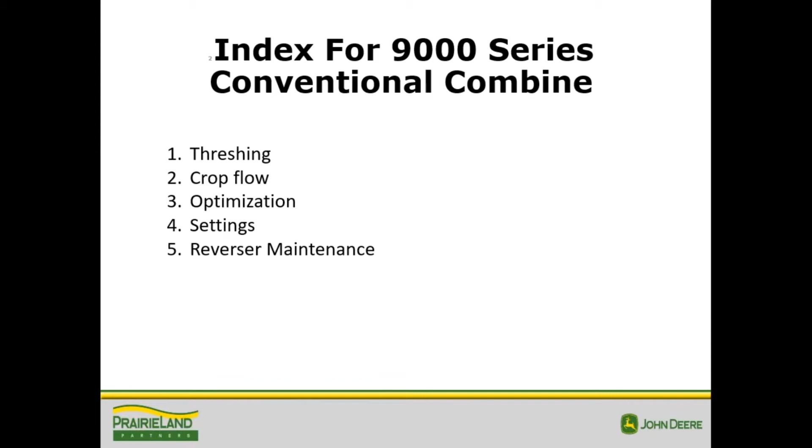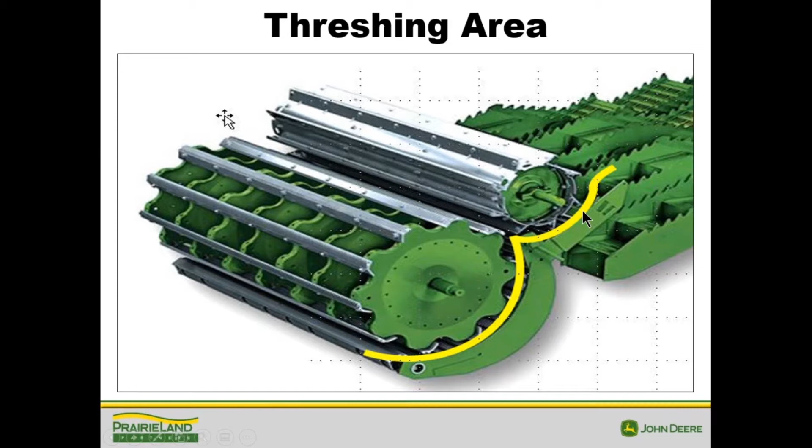As you can see in this slide, we have how the crop flows from the feeder house into the threshing section between the rasp bar cylinder and the concaves, up through and then onto the discharge beater, with the discharge beater having a grate below it, kind of simulating what the concave does. This is just a way that we can better envision how the crop flows through the combine, with the straw walkers taking away the crop material off the back of the discharge beater and the grain coming back down through the shaker pan, landing on the chaffer, which are all other sections that we have on video, along with straw walkers and the cleaning shoe. This video shows how the threshing action happens in the rasp bar to concave relationship.

After the video, we will talk about and walk through some adjustments and things to help you make your machine perform the best it can in small grains.

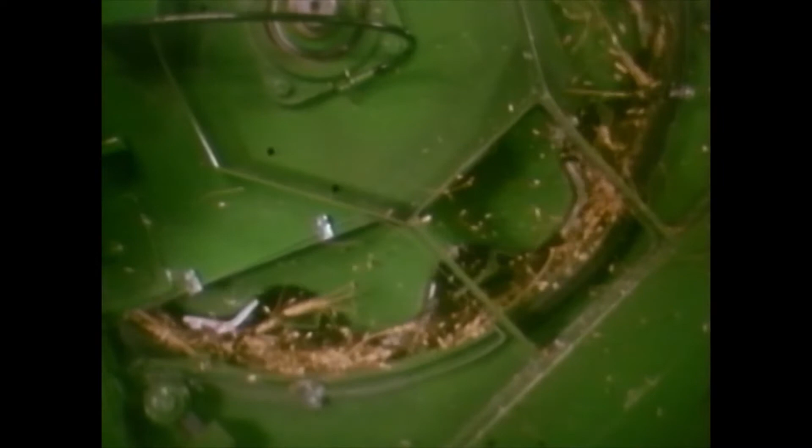When wheat is threshed at the proper cylinder speed and concave opening, the crop is separated completely and gently in the front area of the concave, leaving no unthreshed heads. On maximizer combines equipped with the small grain concave, threshed grain falls rapidly through the large openings.

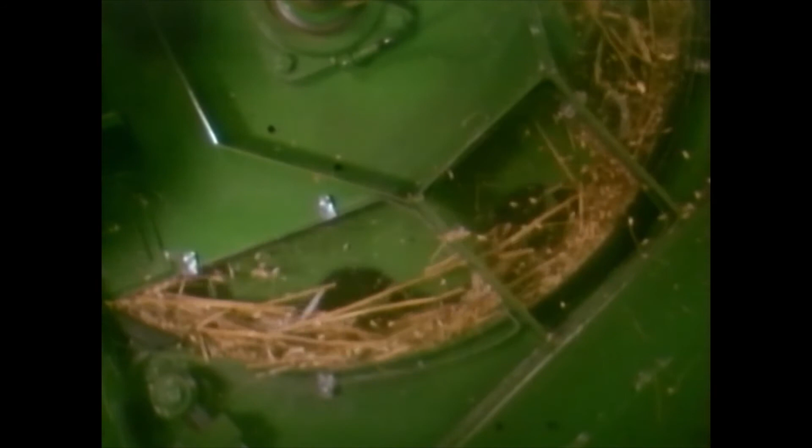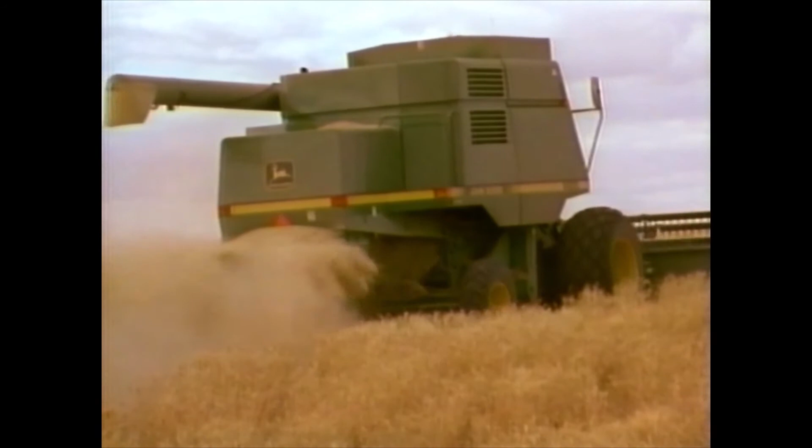If the concave opening is set too wide in small grain, a blanket of material forms between the concave and the cylinder. It's too thick to allow good separation. The heads are not threshed completely, and smaller quantities of grain are separated through the concave. More grain moves to the straw walkers than they were designed to handle, and grain losses will occur. When this happens, start closing the concave.

When the concave spacing is too tight, the straw is broken apart and excessive amounts fall through the concave and into the cleaning system. When you find broken straw on the chaffer and straw particles in the grain tank, check the concave spacing. Remember that the cylinder and concave of a maximizer combine work as a team.

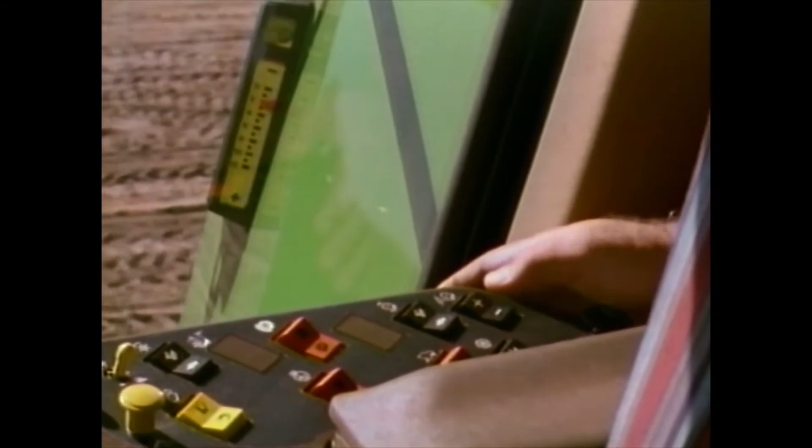Adjust only one setting at a time and base it on your harvesting results. Then fine-tune your adjustments as crop conditions change. It can make the difference in grain quality and field performance.

After the concave and cylinder, the crop moves to the large diameter beater. Its job is to direct material from the cylinder to the straw walkers. Normally, the beater speed is the same as the cylinder speed. As the cylinder speed is lowered, the beater speed is also lowered. This helps reduce grain damage.

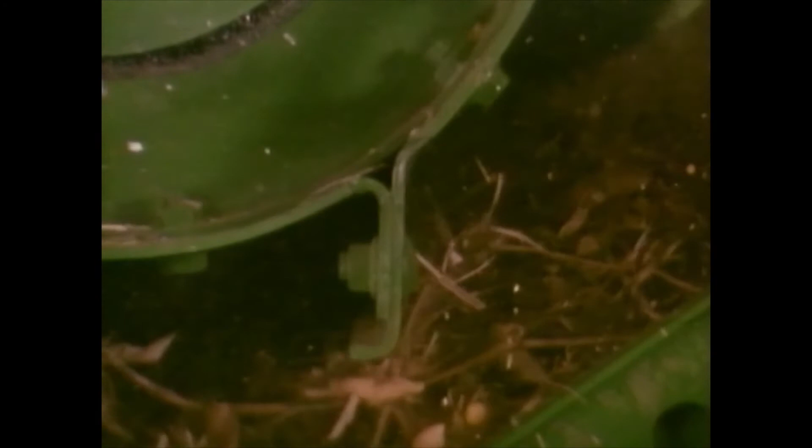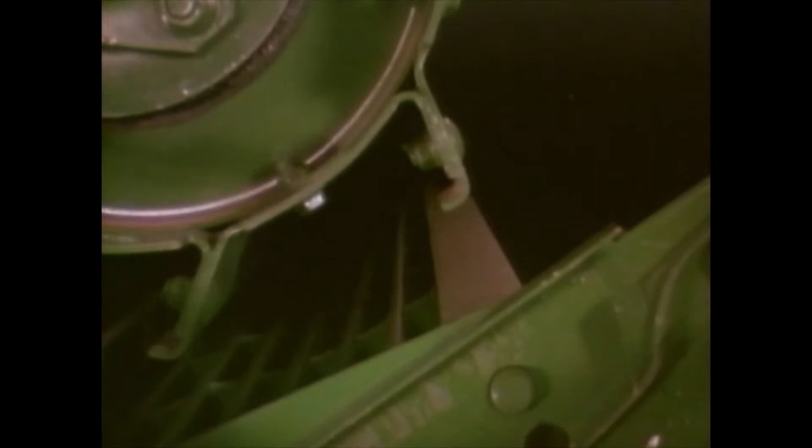When harvesting specialty crops, an option is available to let the beater run 25% slower than the cylinder. A grate below the beater acts like an extension of the concave. Its position is adjustable. Set the grate in the up position when harvesting small grain, and in the down position for less aggressive handling when harvesting corn.

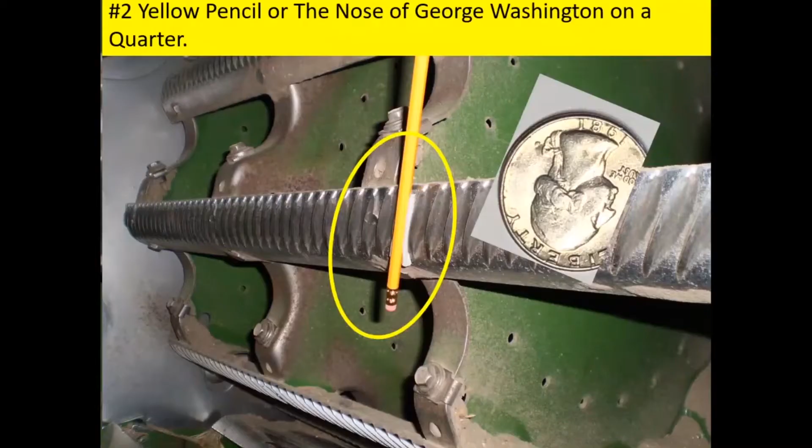That video helps us understand better how the rasp bar cylinder and the concaves work together to complete your threshing before it throws the material up onto the straw walkers.

Before we talk too much about concave adjustments and how to set the concaves for your crop conditions, let's take a look at the rasp bar cylinder bars and make sure we understand when we should be replacing them. As you can see in this illustration, if a number 2 yellow pencil was set down between the rasp bars and the top of the pencil was flush with the top of the rasp bars, that's a good indicator that we should be replacing our rasp bars due to the wear lost on top of the rasp bar.

Also, I like to look across and see how even they are all the way across. Another example of how to check it: if you have a quarter on you, put the quarter into it. It touches the bottom of the rasp bar, but if George Washington's nose is starting to appear, that means our rasp bars are starting to be worn to the point where we're going to lose effectiveness on our threshing and separating abilities.

So Dave, should we be checking this in the middle like your picture, like your pencil is shown there? Well, typically in the middle of the cylinder rasp bars, this area is where the tailings elevator has a tendency to deliver the most material back to. That's an area that will then show more wear because it has more material being threshed and rethreshed there. We'll be talking about how to adjust and overcome the tailings elevator volume and what that can do to the machine's capacity in our cleaning shoe video, which we encourage you to look for on our PrairieLand Advantage.

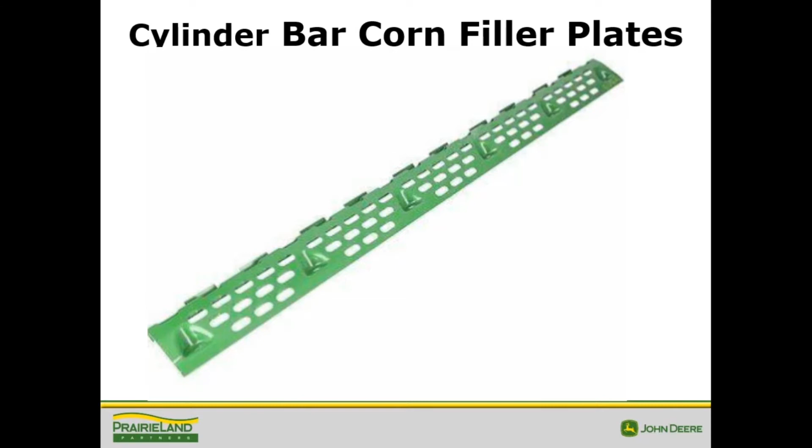Let's talk just a little bit about concave to rasp bar cylinder adjustments and settings. But let's first talk about the settings for the concave clearance, which are only as good as the calibration and the accuracy of what we do.

With that said, we want to make sure our concave is level left to right across the width of the feeder house opening underneath there by the threshing door, and also at the rear through the inspection doors. We'll talk about that in upcoming slides. But we also want to make sure our front to rear adjustment is also set accurately, and that we have our mechanical stops in place once we get our final adjustments done, and we've reset zero on our calibration of our concave indicator.

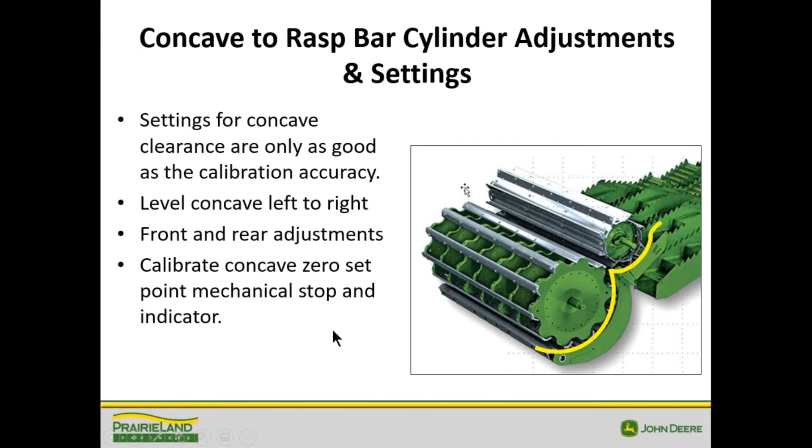Here's an example, as seen in the video, of a rasp bar cylinder to concave relationship with the discharge beater and the discharge beater grate. Let's just talk about this a little bit. When they come from the factory, the concave to rasp bar cylinder setup adjustments were all set for corn, and that was the best performance this machine could have, was in corn, when we kept an equal spacing in the front and the rear of the concaves.

But in particular with small grains, we found that we have a lot more straw walker losses, and we found a way to overcome that. That's by what we call the wedge effect.

The wedge effect takes this pinch point they talked about on the front of the concave in that video, and moves it to the rear. So we have this full area of crop area where the rasp bar and the concave interact to thresh your crop. This wedge effect, the full distance here, allows material falling through the concave, and allows the cylinder, rasp bar, and concave to continue threshing your crop aggressively without just releasing it.

In the settings from the factory, the tech manuals talk about that threshing area being right here, and then behind this green arrow toward the back it would be released and wouldn't have as much threshing action going on. So we've learned over the years to go ahead and set the front of the concave and the rear of the concave at a different setting.

Also in this picture, and we'll talk about it more down in another slide or two, the discharge beater has 2 holes for selections, and we wanted it, like they talked about in the video for small grains, in the lower hole, or the grain discharge beater in the up position. Also remind me, we'll talk about the beater grate curtains as we get farther down the slides.

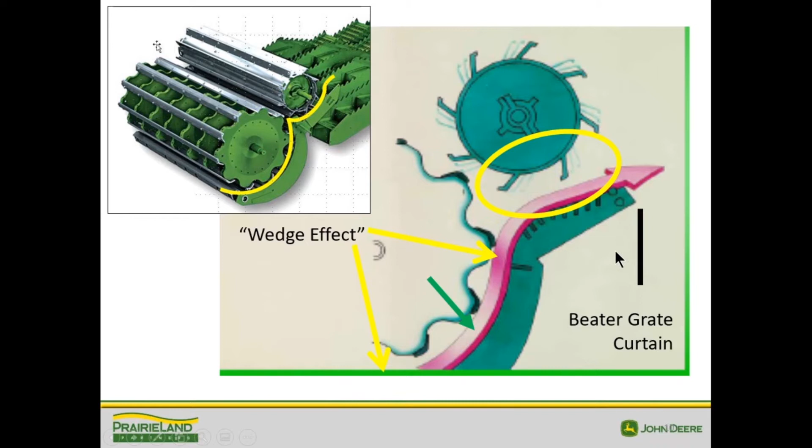Setting the concave to rasp bar cylinder stop and the spacing correctly is critical in how we set up this machine to thresh wheat and keep the losses off the straw walker, and as much grain for the straw walkers to manage and handle. So with that said...

This would be the upper right-hand concave inspection hole off the side of the machine. This would be the cylinder drive belt, just as a relationship to it. There would be another concave inspection hole up here in the right-hand corner, just in front or below our dual range cylinder drive, if we were envisioning that inspection hole down here.

This is what they call the 13th bar of the concave. There is this notch that you see in the concave that should be in front of that inspection hole. And just below that, at the 12th bar down here, is the high bar of the concave.

So as we're setting this up for small grains and adjusting it, we want to roll the machine over by hand by disengaging the dual range cylinder drive and pulling the lockout pins out. We want to take and roll this concave up and hand turn the cylinder drive until we hear it start to tick.

When it starts to tick against the rasp bar, we need to follow that rasp bar around with a can of yellow paint. We paint the end of the cylinder bar on this end, then go to the left-hand side of the machine and paint the cylinder bar so we know exactly where that cylinder bar is and which one is the high one.

Then with that adjustment made, we want to start opening up the front by incremental adjustment and closing the rear down until we come to the point where we don't have that high bar in the middle hitting, and we start to get within and start ticking against the concave on the rear with the rasp bars.

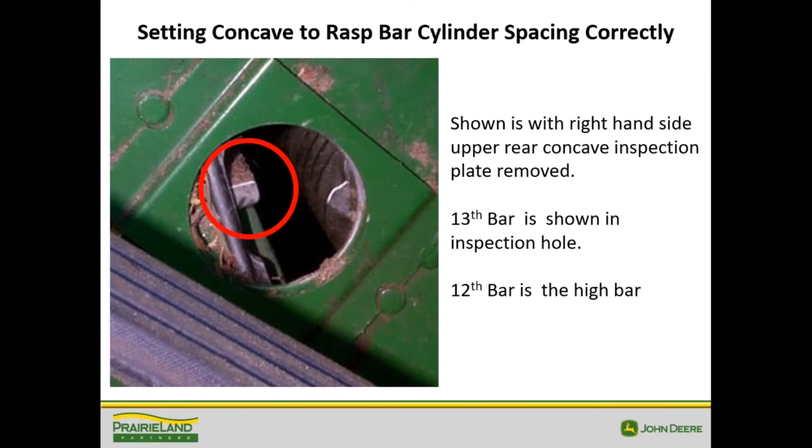So how do I tell when my concaves might need to be replaced? We need to look at the distance of material above the concave rods or wires, relative to the material between the hole of the wires and the top of the bar. If I go to the left or right side of my concaves where there isn't much material flow against the separator sidewalls, I can tell how much original material was on top of my wires—that's where the material hasn't done much threshing and we don't have much wear.

Then I'd look at how much material I've lost at the middle of the machine, around where the tailings elevator dumps, which is one of the areas that wears the most. It should not be more than an 1/8 inch total combined between the rasp type cylinder bar and the concaves—meaning the concave can only have 1/16 of an inch of wear, and the rasp bar cylinder should only have 1/16 of an inch. If we're more than that 1/8 inch total, we'll start to lose performance and effectiveness of how our rasp bar and concave thresh, before we even have the adjustments we need to make.

The other thing I want to look at with my concaves—something that happens during harvest—is making sure we don't plug our concaves. There's potential you ingested dirt from a gopher mound or a pile of dirt in the field, or went over a terrace with the header and ingested some dirt. At that point, or daily in my checkup when I'm opening up that rock trap, I want to look to see if my concaves might have some dirt debris plugged in them.

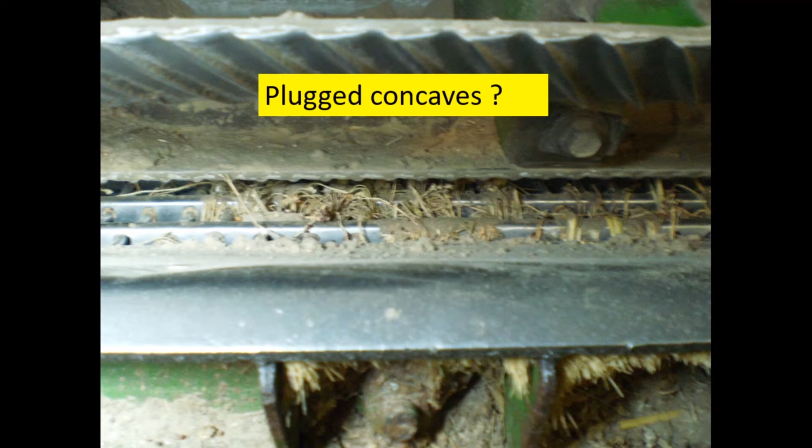Or I've seen situations where the customer maybe started up too soon after a shower came through at wheat harvest or soybean harvest, and the material wasn't dry enough to flow, so it plugged the concaves.

This next video is going to talk about threshing in the concaves and the inserts at the rear of the concave. Let's play it, and then we'll talk about some more things with concave inserts.

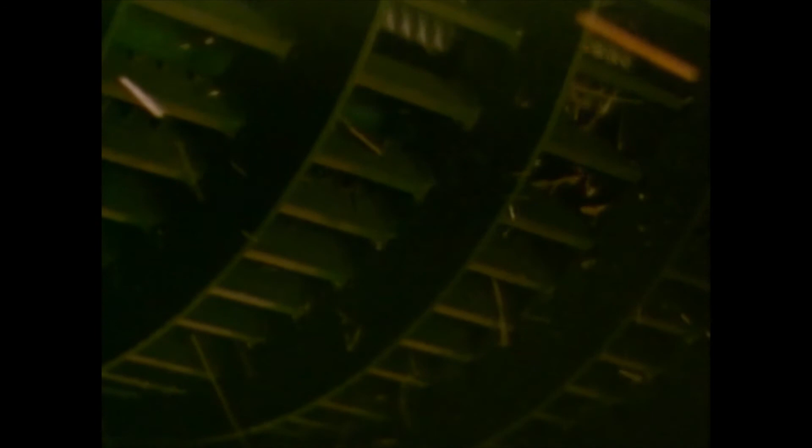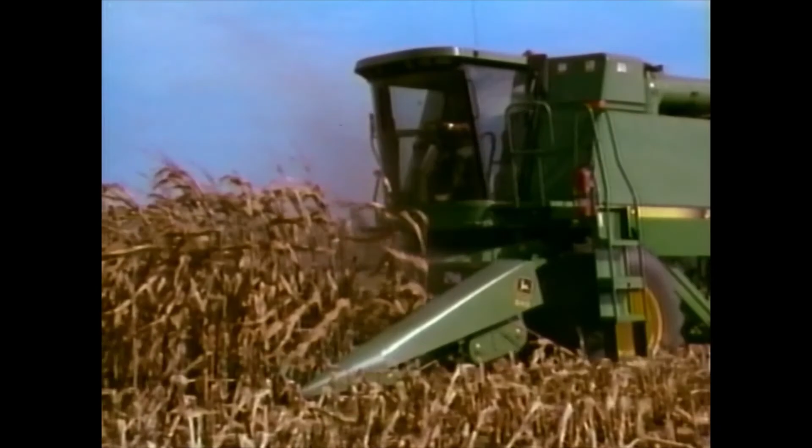If your Maximizer combine is equipped with a small grain concave, the 5 rear bars have no wires running through them. Being open provides extra separation in small grains. The larger open area also helps minimize grain damage. This concave is recommended for harvesting small grain, low moisture field corn, and any specialty crop.

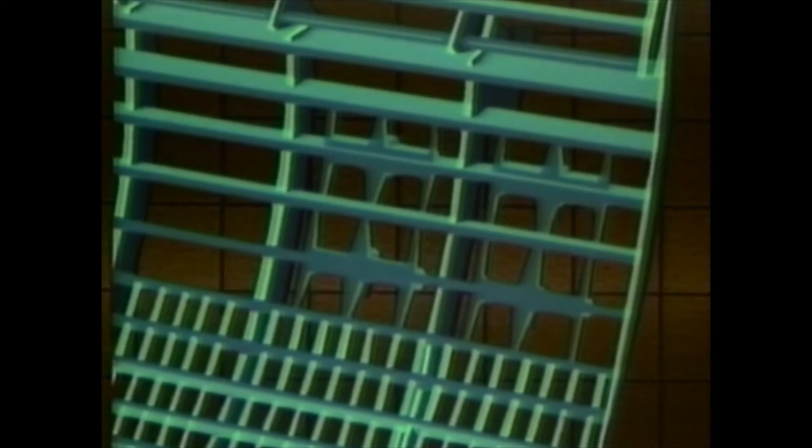Depending upon variety and crop conditions, the small grain concave may allow too many unthreshed kernels to pass through. This is easily remedied by installing corn inserts to the rear open section of the small grain concave. The inserts hold the crop for complete threshing. Those rear corn concave inserts blank off the material and keep it inside the concave, getting ready to be handed off to the discharge beater.

These inserts are handy if we're breaking up cobs in corn and need to maintain cob quality so we don't get little fine chips in the grain tank, or if we have unthreshed wheat heads, like they talked about in the video, trying to push through here.

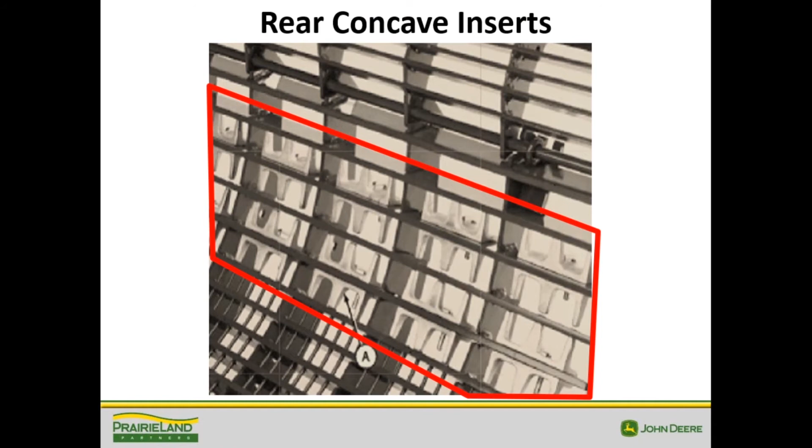Shelbourne stripper header owners, these would be the inserts you need in the full set for your Shelbourne stripper headers, to prevent material from the head being pushed through before it's fully threshed. These can be bought and found at your parts department.

If we're in small grains and having a hard time getting the white caps or the grain to thresh properly, there are front concave closure strips that can be put in from underneath the shoe auger bed front door. You open it up and latch these to the bottom of the concave.

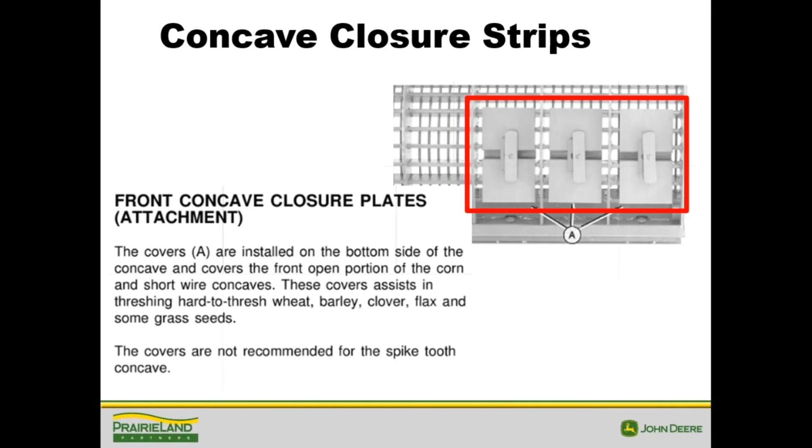This is looking from the bottom of the concave up with these cover closure plates in. Sometimes we have loose grain that's threshed at the header, auger, feeder house chain, and then when it's delivered to the concave, it wants to fall directly through to the shoe augers. With these cover plates installed, it will hold the material up there and allow the cylinder and the rasp bar in the concave to do its threshing action.

One thing to keep in mind, with small grains in the A position, which is a raised beater grate position, we do have what we call the beater grate curtain that can hang off the back of the discharge beater grate. But if we lowered it into the B position, we have to remove that discharge beater grate curtain to keep from damaging it while the straw walkers are operating underneath here.

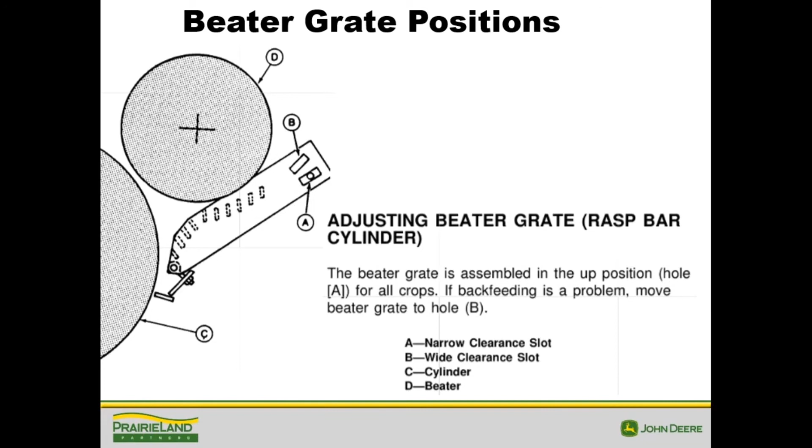Why do we want beater grate curtains in the first place? As we run this cylinder and the threshing starts to happen at the higher RPMs, typically around 900 to 1000 RPM, that crop is flying out of there with such momentum that it wants to throw too much loose grain on top of the front part of the walkers. When that happens, we have material that has to be worked back off the front of the walkers down onto the shoe augers. With this beater grate curtain in here, we stop that flow through of material and that momentum, and keep it from getting on the walkers too far.

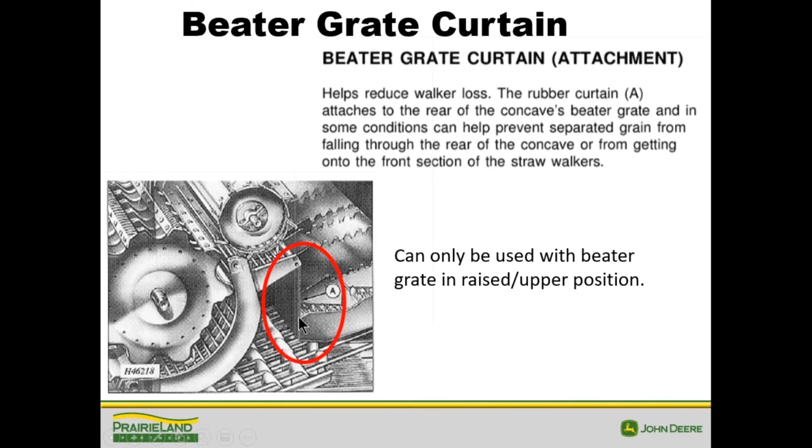Keep in mind, you have to keep your discharge beater grate in the upper position, or else these beater grate curtains will hang on top of the walkers and be torn up by the walkers.

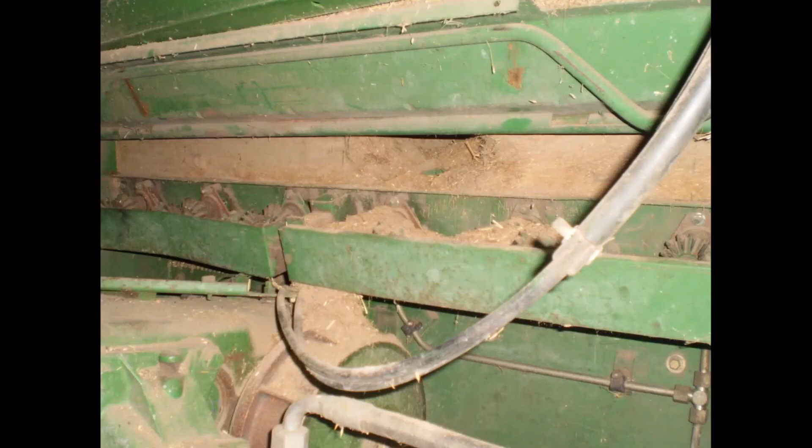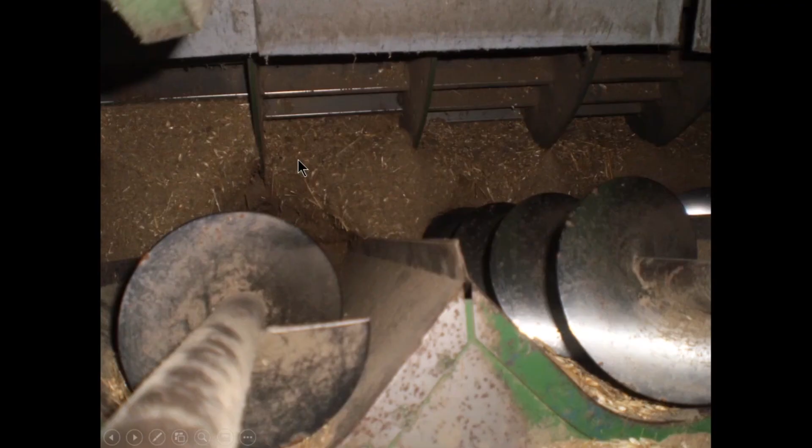One thing we've seen over the years is if you start up a harvest and maybe the crop isn't completely dried out, or you've started into a harvest just after a shower and the shoe auger beds had water or moisture in them, or the crop wasn't quite dry, it starts to bridge up on top of those shoe augers and the shoe augers will tunnel underneath there. Then the crop transition won't fall down on the shoe augers and it blocks or blanks off the front of the concave and plugs the concave.

That just takes away the threshing and separating area of the concaves that we need to utilize for the machine's capacity. So every once in a while, I would encourage you to stop and check underneath your machine, especially daily when you're dumping your rock trap. Just take a look up in there and see if you've got any material blocking your concaves, causing you to lose some of your threshing ability.

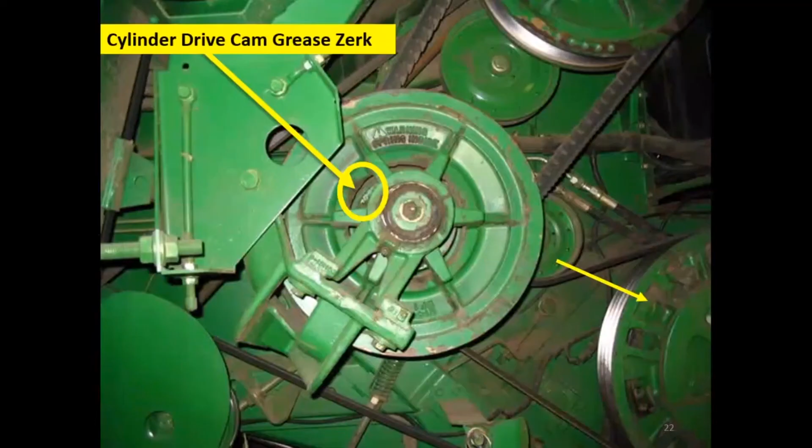As we take a look at the threshing section of our machine, we also want to talk about the cylinder drives and how important it is for those cylinder drives to be maintained in a way that will give you good performance through your harvest season.

Let's first start talking about the dual range cylinder drive. The operator's manual talks about putting an arrow at the 12 o'clock position, then pulling a plug to check oil level. With the arrow at 12 o'clock, that plug ends up about the 7 o'clock position, and what we've found is that's just slightly more oil than it should have in that gear case, because it'll want to push oil out the seals and cause you the frustration of getting 80-90 weight oil on the belts.

My advice, our advice at PrairieLand Partners, would be to remove that plug and roll that arrow to the 11 o'clock position, which puts the plug about the 6:30, 6:45 position, just a little lower than the 12 o'clock position on that arrow. This allows us to maintain the correct oil level, so we don't have seals that are going to potentially leak on you and cause trouble for your threshing on your drives.

The other thing to pay attention to and spend time with before you go to the harvest field is to run your cylinder drives all the way up into the fast position. That means the upper cylinder drive pulley would be closed, and this lower drive sheave assembly unit would be spread open. Inside the center of that sheave there's a cavity for grease that we want to fill.